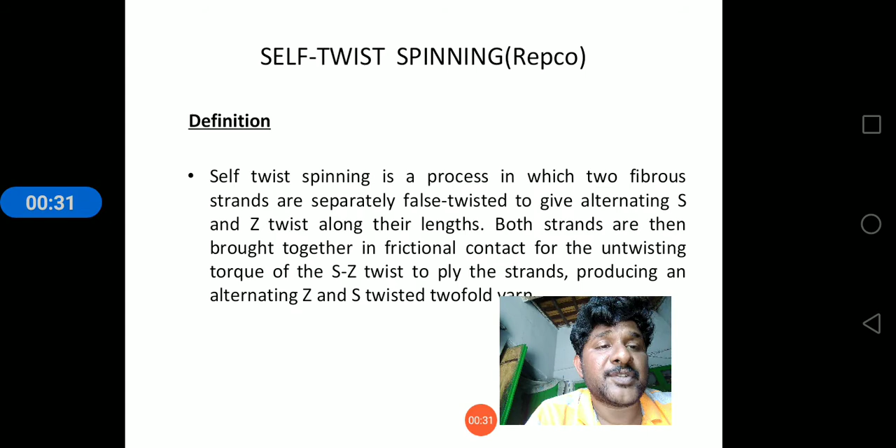The second topic of the new spinning system is self-twist spinning. Self-twist spinning is a process in which two fibrous strands are separated and false twisted to give alternating S and Z twist along their lengths. Both strands are then brought together in frictional contact, and the untwisting torque plies the strands, producing alternating Z and S twisted twofold yarns.

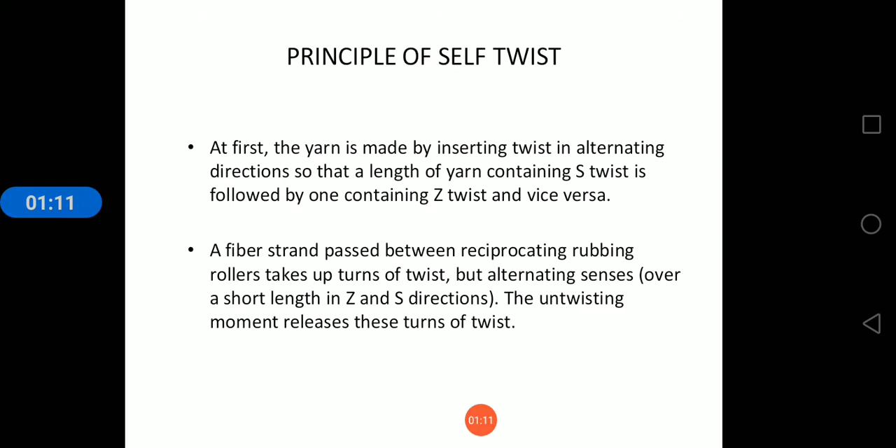Principle of self-twist. First, the yarn is made by inserting twist in alternating directions, so that a length of yarn containing S twist is followed by one containing Z twist and vice versa. A fiber strand passed between reciprocating rubbing rollers takes up turns of twist in alternating senses over short lengths in Z and S directions. The untwisting moment releases these turns of twist.

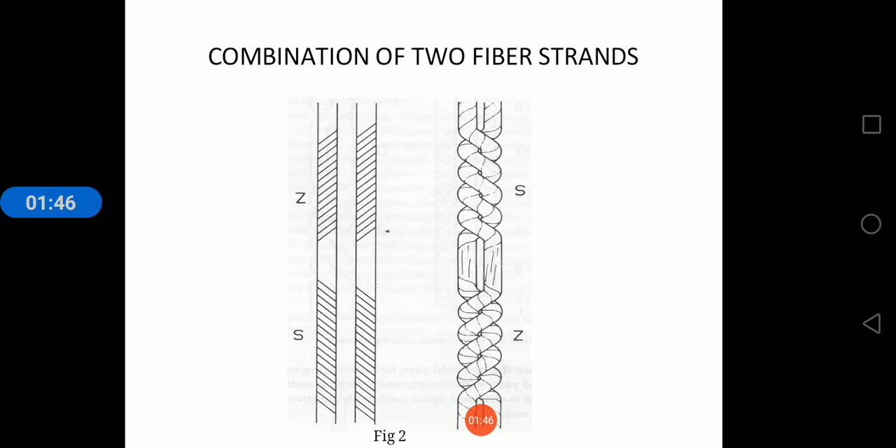The figure shows two fiber strands with the same twist directions passing in parallel, closely adjacent to each other. Then the untwisting moment cannot act separately on the individual yarns anymore. It acts on both yarns together, twisting them around each other, forming an alternately twisted two-ply structure in which the torque of the two strands is balanced by the folding torque of the pair. This process is called self-twisting and combining of two fiber strands.

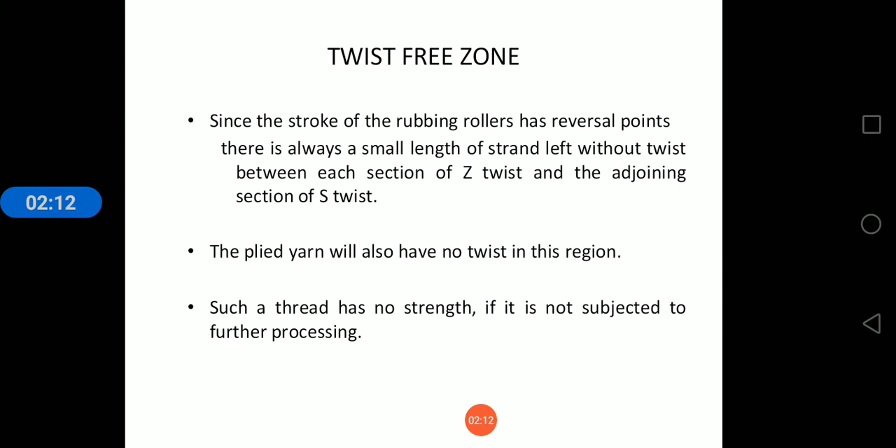Since the stroke of the rubbing rollers has reversal points, there is always a small length of strand left without twist between each section of Z twist and the adjoining section of S twist. The plied yarn will also have no twist in this region. Such a thread has no strength if it is not subjected to further processing.

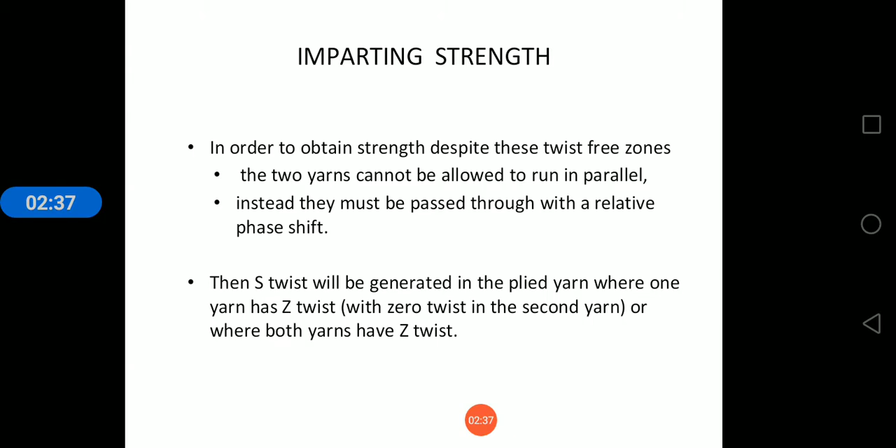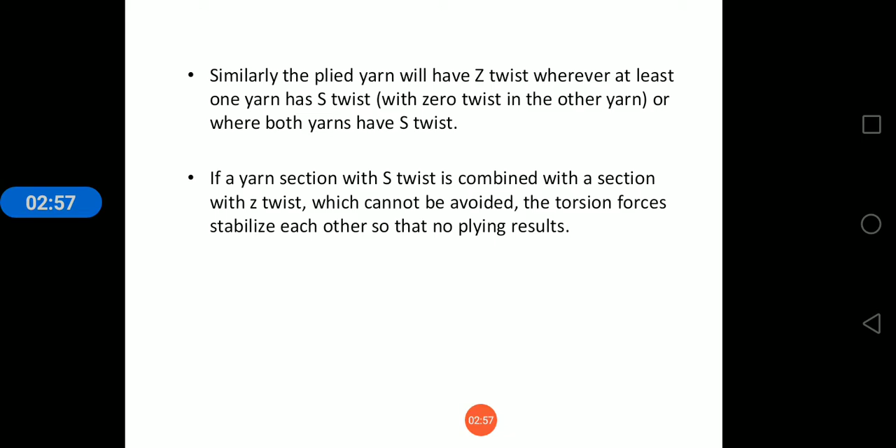Imparting strength. In order to obtain strength despite these twist-free zones, the two yarns cannot be allowed to run in parallel. Instead, they must be passed through with a relative phase shift. Then S twist will be generated in the plied yarn where one or both have Z twist. Similarly, the plied yarn will have Z twist wherever at least one yarn has S twist or where both yarns have S twist. If a yarn section with S twist is combined with a section with Z twist, which cannot be avoided, the torsion forces stabilize each other so that no plying results.

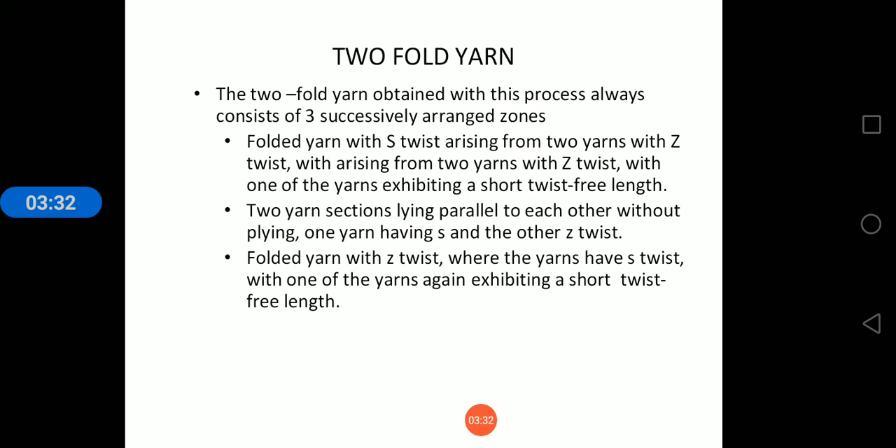Two-folded yarns are obtained when the process always consists of three successively arranged zones. Folded yarn with S twist arising from two yarns with Z twist, with one of the yarns exhibiting a short twist-free length. Two yarn sections lying parallel to each other without plying, one yarn having S and the other Z twist. Folded yarns with Z twist where the yarns have S twist, with one of the yarns again exhibiting a short twist-free length. Instead of one large weak point, three small weak points have been created.

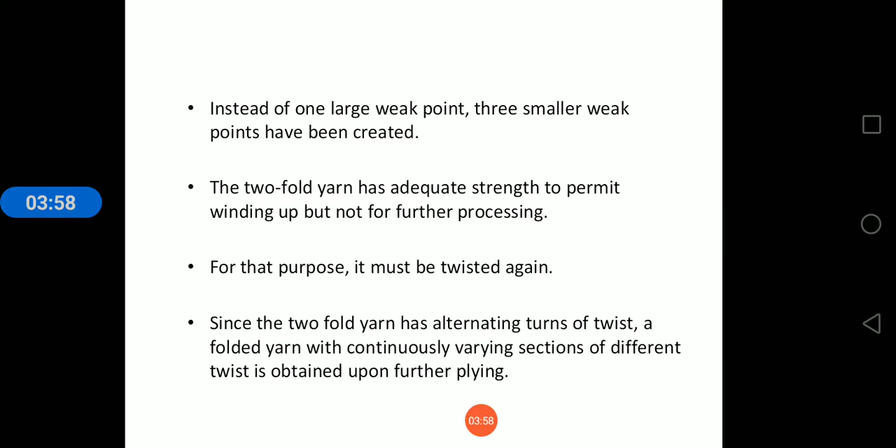The folded yarn has adequate strength to permit winding but not further processing. For that purpose it must be twisted again. Since the two folded yarns have alternating turns of twist, a folded yarn with continuously varying sections of different twist is obtained upon further plying. Repco self-twist spinning process.

In this, the feed of 8 roving strands runs from a creel into the double apron drafting arrangement, where they are drafted in a normal drafting range. A rubbing assembly adjoins the drafting arrangement, consisting of two reciprocating rubbing rollers. In passing through the device, the fiber strands leaving the drafting arrangement are subjected to alternating twist. Before the turns of twist can cancel each other out, the strands are brought together in pairs with a phase shift between the components of the pair.

This gives the previously described self-twist two-fold yarns. The four yarns proceed to the winding device, where they are wound onto cross-wound packages. This process is suited only to the spinning of long staple fibers and is therefore used solely in worsted spinning.

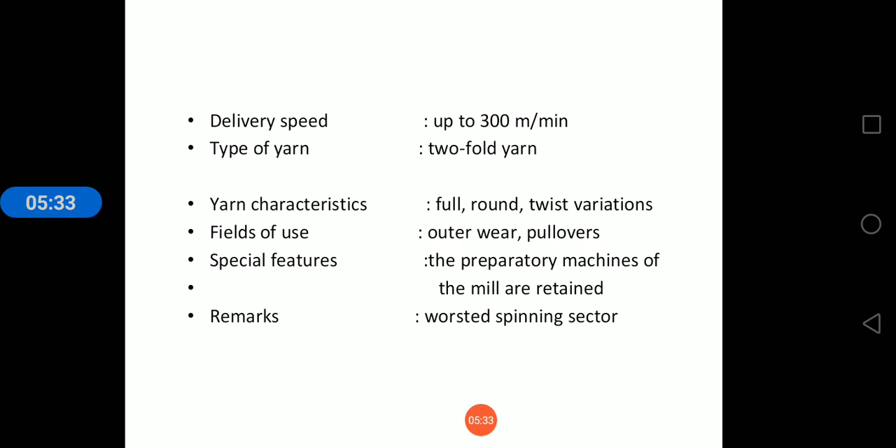Specifications of Repco: number of spinning positions per machine, 5. The raw materials used are wool and synthetic, and the range of yarn count is 13 to 65 tex, 9 by 2 to 40 by 2 count. Feed stock is roving, and delivery speed is up to 300 meters per minute. Type of yarn: two-folded yarns. Yarn characteristics: full round, twist variations. Field of use: outerwear, pullovers. Special features: the preparatory machines of mills are retained. Remarks: worsted spinning sector.

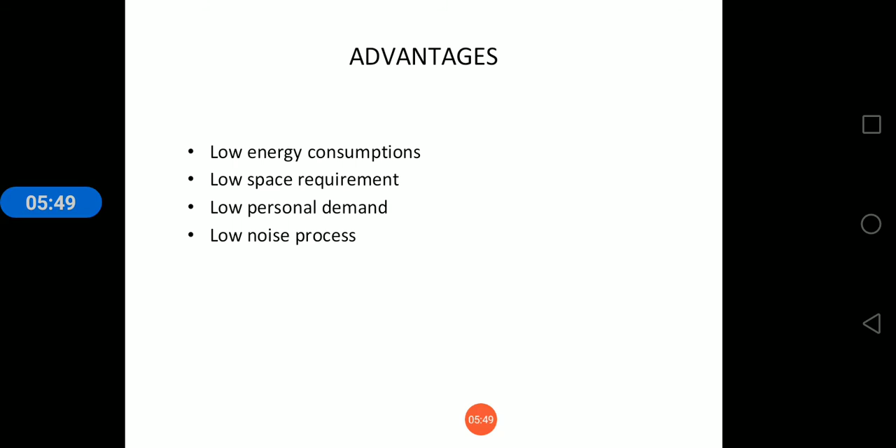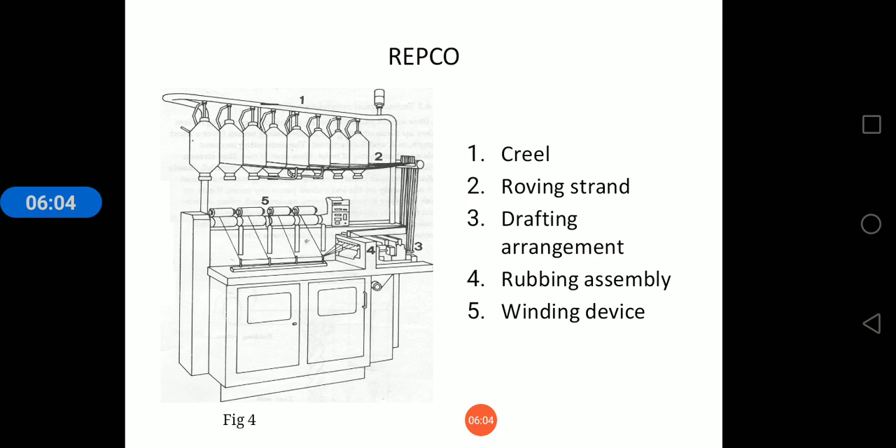Advantages of the Repco: low energy consumption, low space requirement, low personnel demands, and a low noise process. These are the main advantages of the Repco spinning process. The roving strands from the creel pass through the drafting arrangement, rubbing assembly, and winding device. It is very easy to feed the creel and drafting arrangement, and the 4 yarns are processed at the winding devices. These are the advantages and disadvantages of the Repco spinning process.